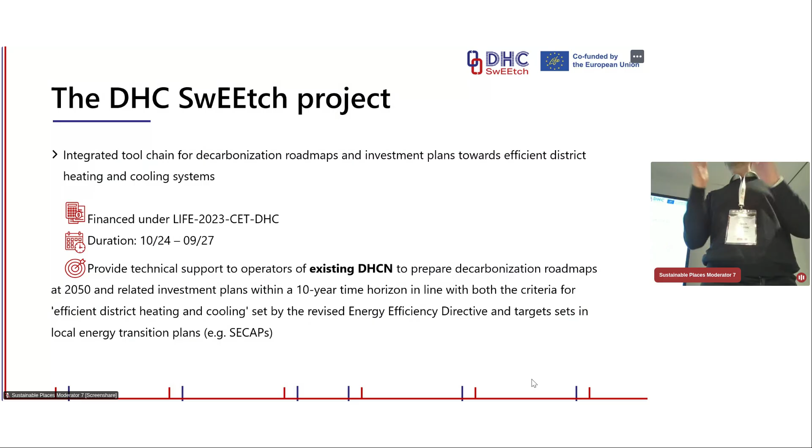And part of the roundtable will be exactly about understanding these criteria that change over time. And that's one of the big issues. Partners, not so important. I can only mention that we have A2A, an Italian operator, and 2 Croatian operators, and indirectly a Polish operator.

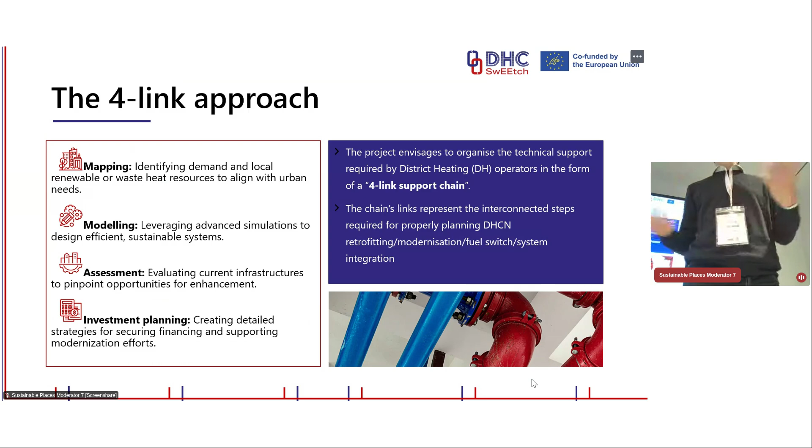Specificity of DHC SwEEtch, that's more, if you will, a communication issue. It's divided in 4 links. And the 4 links are about identifying and mapping, on the one hand, locally available renewables. On the other hand, locally available waste heat. And on the other hand, potential for extending the demand. So which additional customers can the operator reach in the future to increase the business.

Then comes selecting scenarios, we call them modernization scenarios, that have to meet the new criteria posed by the Energy Efficiency Directive. We simulate them, and afterwards we evaluate them from a financial and bankability perspective. So that means also we have to quantify the cost to make each scenario come true.

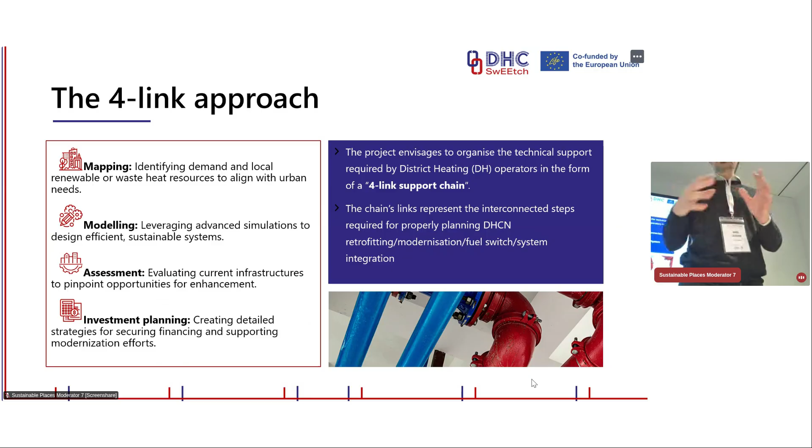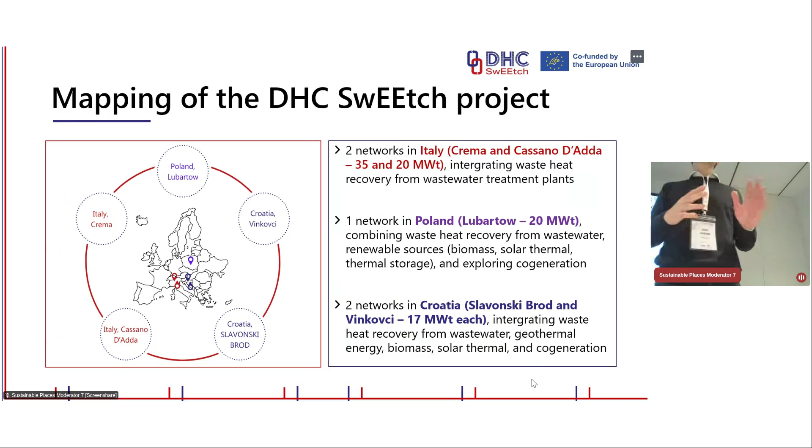Our case studies are 2 networks, all real networks, of course. 2 networks in Italy, here around Milano, let's say, 35 and 20 megawatts peak thermal demand. 1 case study in Poland, and 2 case studies in Croatia. And you see the size is medium to small, especially if you compare to Northern Europe or Central Europe. But for Italian standards, it's medium size, I would say.

Okay, other specificities. First of all, what the Italian partner URAC is doing, they developed a methodology for a relatively quick evaluation or quantification of available waste heat, available renewables, and potential additional demand in terms of customers. I think the most interesting is the waste heat part, because for renewables there are a lot of maps meanwhile available at European level, at local level, but waste heat is a bit different. It requires knowing the processes, the industries, and that's not always public domain.

To make it short, I'm also not an expert on that, but they based it on the NACE code. In Italian, we spell it NACE. I don't know in English how you would spell it, but it's a way to start from official information publicly available in most cases, and out of this very simple information come up with a meaningful estimation of how much waste heat could be available and at what temperature level, because that's of course one of the big changes when it comes to district heating.

Sorry, it's a bit slow.

Okay, I forgot now. Here we have IES, represented here today by 2 colleagues, who is extending the software, mainly adding a dashboard for the investment planning. So the idea is that IES, which is a commercial software company based in Ireland, at the end of the project also comes up, after simulations, with a dashboard meant for investors that allows to identify and show the most important KPIs a bank or a board would evaluate before deciding we go or not, we finance or not your investment.

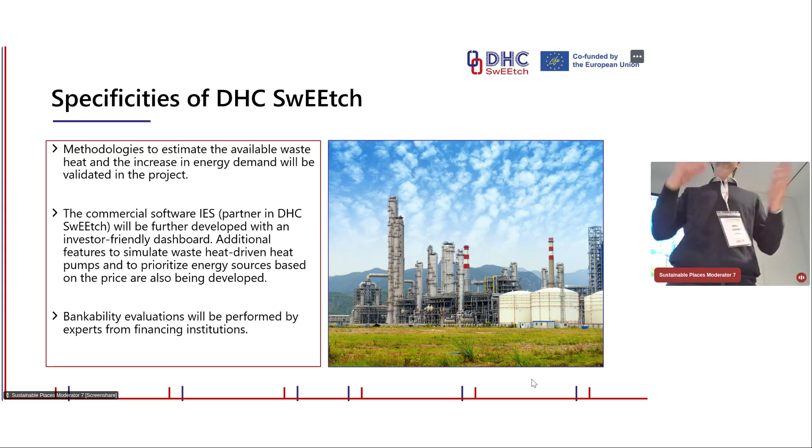software environment. So they're now trying, for example, to add the capability of heat pumps to pick up the waste heat available, mapped in the previous part of the work I mentioned before, and consider the temperature levels. So this is part of the work being done, and as I said, bankability.

Finally, a general comment: when you work on a district heating extension or modernization problem, or even a new network, that has, unlike other technological environments, as one of the main challenges the fact that you have to work with many stakeholders, because it's related to urban planning, it's related to European directives, it's related to technologies, it's related to customers, which are families.

And so what I, as a coordinator, realized pretty soon is that if we work like we do in EU projects, work package by work package, so first we do the mapping, then we select the scenarios, then we simulate, then we see if they are bankable, potentially this could be an almost never-ending loop. Because you come to the end and realize this scenario is financially not viable, or maybe it's viable, but a bank would not finance it because it's too risky.

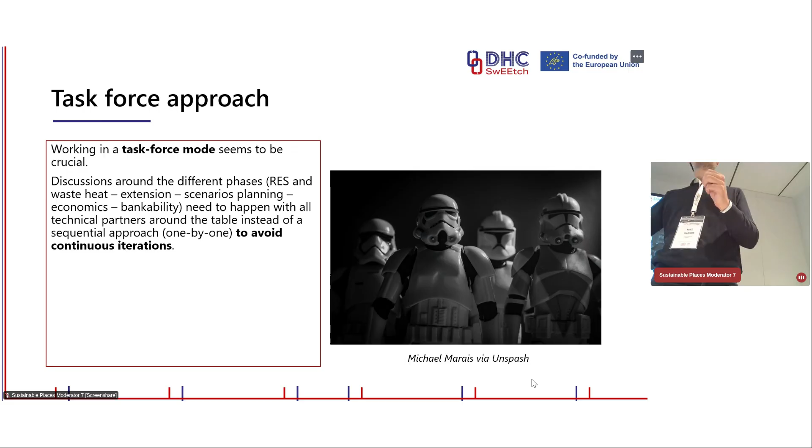So our approach is trying to be a task force approach, where we sit around the table for each case study with all the heads around that table and try to anticipate. So right from the beginning, does this measure make sense? Not only technologically, not only energetically, not only from an acceptance point of view, but also from a bankability and financial perspective. That's, I think, one of the main challenges.

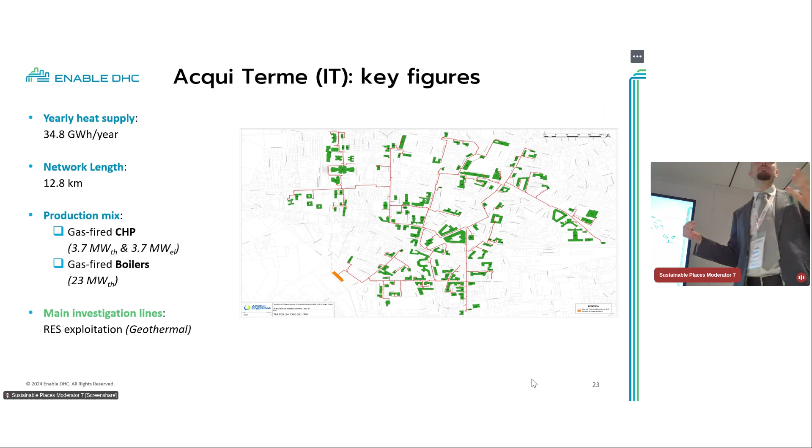Basically, we as Optit are trying to aid them in this endeavor. First of all, we try to split the issue in two parts. A, what can you do with your current assets without more or less spending any money? So you do have efficiency, you have flexibility inherently in your portfolio of assets. Can you dispatch them efficiently in your day-to-day operation and still achieve economic and/or environmental results?

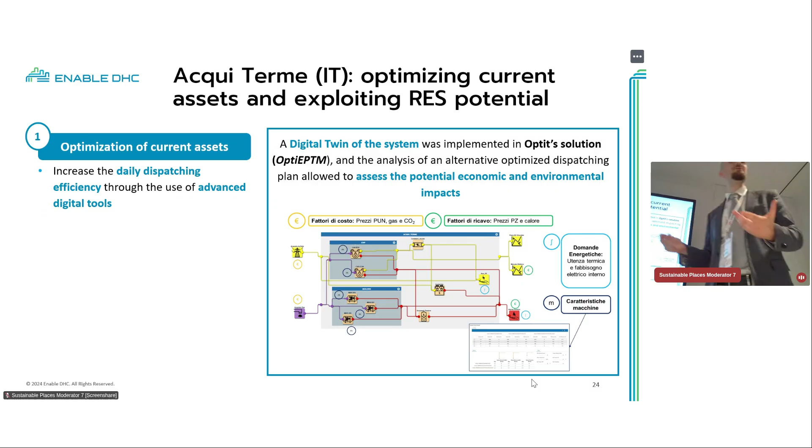We've done so with our proprietary tool, the OptiEPTM. Basically, we created a digital twin of the system and created a benchmark to assess the reduction in CO2 and the increase of euros that solutions like this can bring. Once you have a digital twin of a system, you can look at the future, understanding how can I expand my portfolio? How can I integrate new RES sources? You can do it in a bunch of ways.

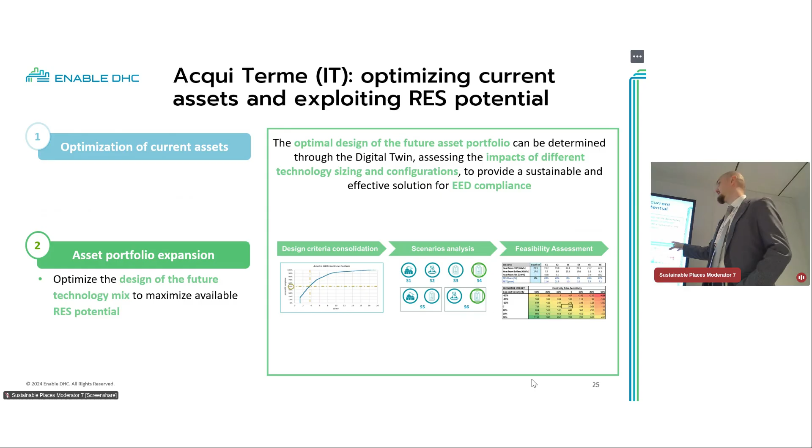The situation there is pretty peculiar because they have a high geothermal potential, so of course that's the first thing that came to mind. So basically, we are aiding them to identify the best design. It wasn't really a matter of which technology, because in that case it was pretty clear. But we are aiding them in assessing what size the storage must be, or what size the heat pump must be, etc. Starting from understanding what the design criteria should be, analyzing a bunch of scenarios, and then understanding which scenarios are actually feasible from a technical and economic standpoint.

Moving on to another very different case, Wien. I think you know where Wien is. It's a pretty different kind of system, a different beast, a very big system with its own complexities. And it's a very diverse portfolio there: CHP, waste heat, industrial and waste incineration, heat pumps, biomass units. Basically, they pretty much have it all. And they are trying to understand whether they can expand the technology mix even more, adding some fancy stuff such as carbon capture, green gas, hydrogen, and stuff like that.

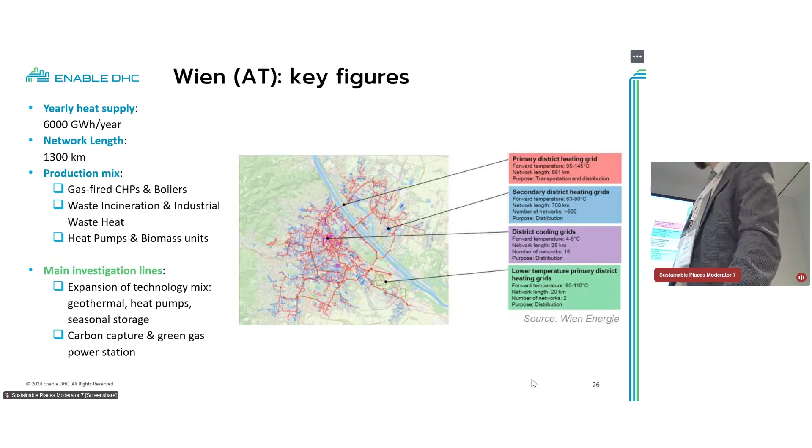AIT is aiding them in this endeavor, and first of all, they are outlining the factors that drive uncertainty in analysis and investment, because of course, you look at the future, you may have some forecasts of anything, but you never know what is going to be tomorrow. They are assessing what the major drivers are, heat demand, commodity prices, and other drivers, to define an uncertainty framework.

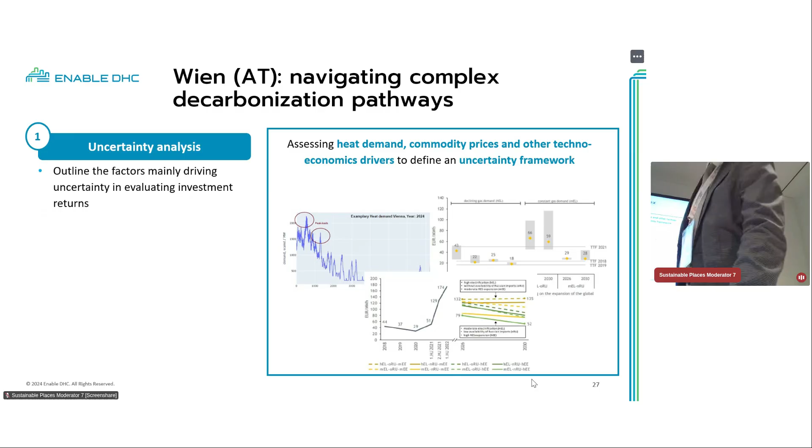Once they've done that, using Monte Carlo simulations, they analyze decarbonization pathways, basically utilizing Monte Carlo simulation as a stress test of the pathways they are hypothesizing. This should lead to a good idea of what's feasible in terms of decarbonization pathway and how robust that assumption is.

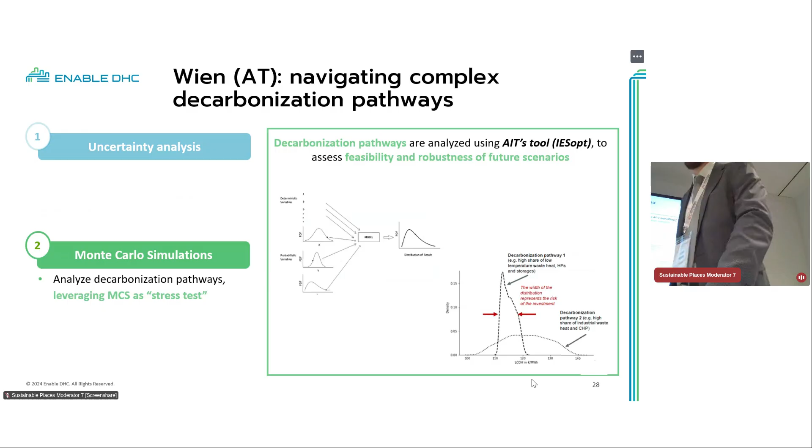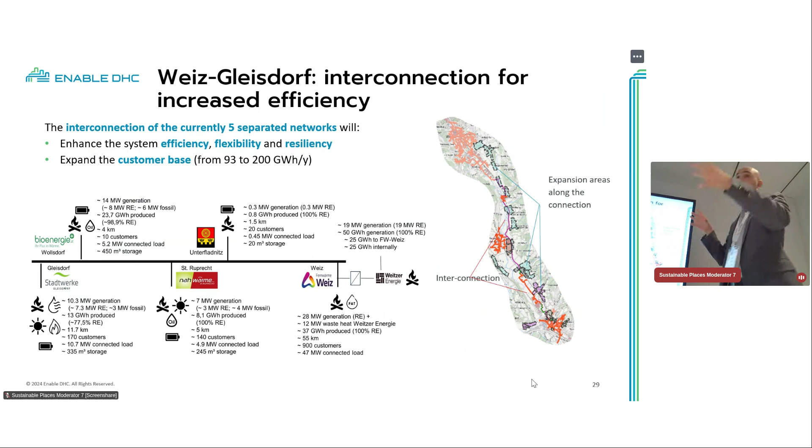Last but not least, Weiz-Gleisdorf, hopefully I pronounced it correctly, a small system in the eastern part of Austria. There, the situation is even different. You have five very small systems, and the challenge here is not really to imagine fancy stuff, rather to do a very simple thing, but it's challenging at the same time. Let's interconnect them, because you can better leverage the already available technologies, such as biomass and so forth. While you're at it, expanding the network and interconnecting the systems, you can connect more customers along the way.

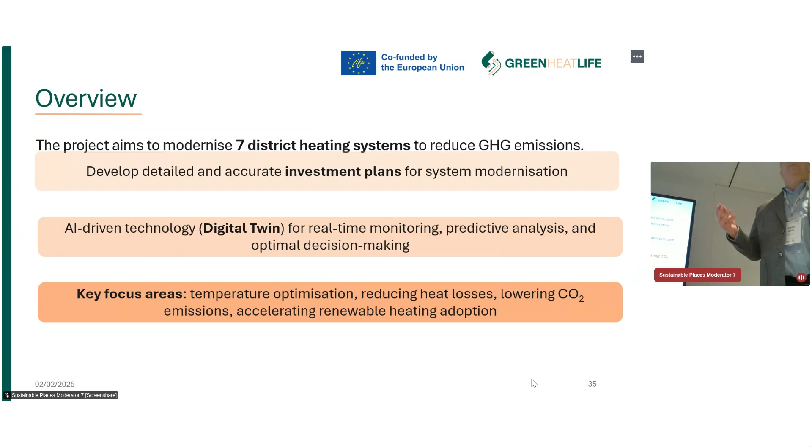Okay, so what is this project about? Basically, the aim is to modernize these 7 district heating systems. And how can this be done? The idea is to create a digital twin for each of these 7 district heating systems. And this digital twin will allow basically 2 outcomes. The first outcome is that we expect to make our networks more efficient by controlling the network temperatures, and the second outcome is an investment plan about decarbonization, and the investment plan will be developed on some decarbonization scenarios that will be run by the digital twin in order to be able to choose the most cost-effective one.

The project consists of 5 work packages, but basically the most important outcomes are creating the digital replica of the system, identifying the critical components of each system in order to find the most effective solutions, improving and optimizing the operational parameters, integrating renewable energies in the systems in the long term, of course, and developing and approving investment plans focused on GHG reduction. Of course, the final part of the job is sharing the best practices, as we are doing today.

So the first step of our project is gathering data, collecting data, and validating them in order to build the digital twins. Some companies have already completed this step. Some are in the process. For instance, Mantova has already completed this part of the process. So the digital twin is up and running, and we are already adopting the optimized set points that the system proposed. While other companies are still gathering data and building the digital twin.

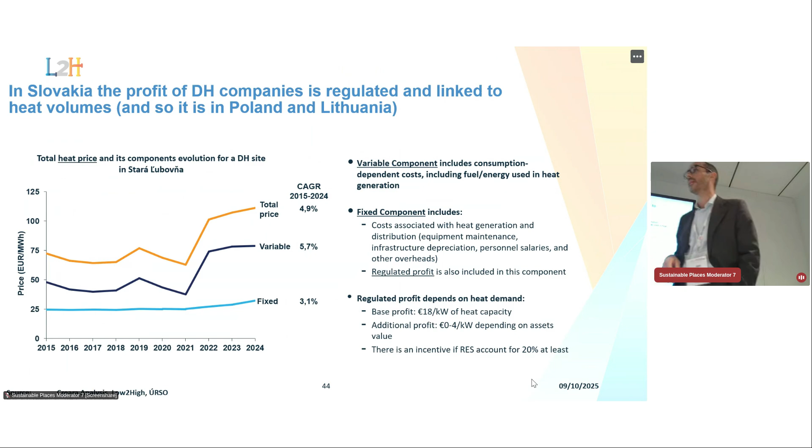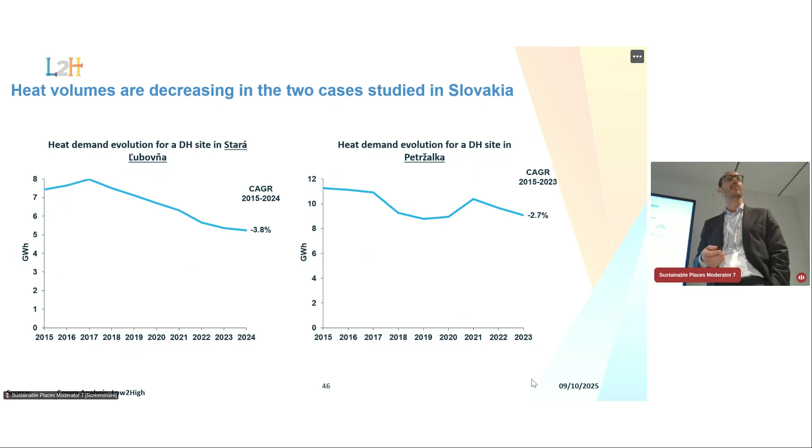Okay, so how are energy volumes evolving in these 2 sites? Essentially, they are decreasing, and this is the issue. We want to decarbonize a business whose volumes and size are decreasing. This is not something very attractive, right? If you're an investor, you don't want to go into a business which is falling. So what we see is it is decreasing between 3% and 4% per year over the last years. And we said, well, we have to forecast this and model this, and which are the elements included in these trends. And we identified 2.

One, this is just a matter of decomposing that variable into parts. The first one is the unitary consumption, that is energy consumption per apartment, how that evolves and why. And the second one is number of apartments connected to the grid. So essentially, you want to see, if possible, more apartments connecting to the grid, and if that is not possible, at least not seeing them getting disconnected.

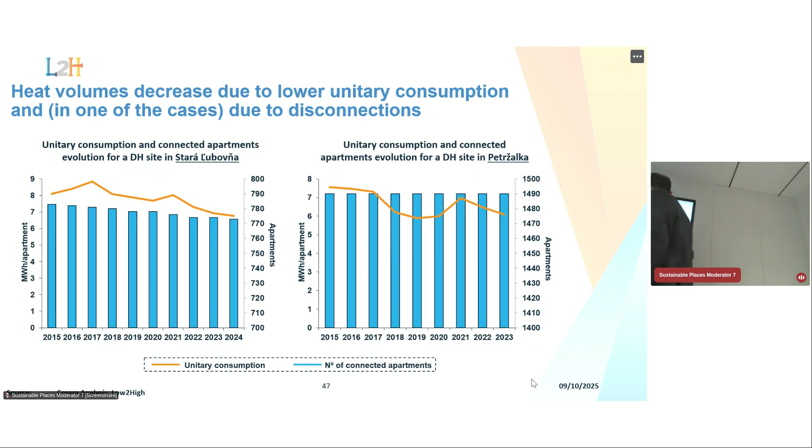So what we see is that in Stara Lubovna, the number of apartments are decreasing. This is the axis over here, slightly, but it is decreasing. While in the other one, they are stable. And the unitary consumption in both cases is decreasing. And let's analyze both of them separately.

This is analyzing the evolution of unitary consumption. One element that has a huge impact is the degree of insulation of buildings. Essentially, in this city, in Petržalka, buildings are being renovated, they are being insulated, and that has a strong correlation with unitary consumption. As you can see, the correlation is very strong. Over here, 90% in 2022, almost all buildings in the city have been renovated, and that means that this element will not be a factor of generating a decrease in sales volumes anymore.

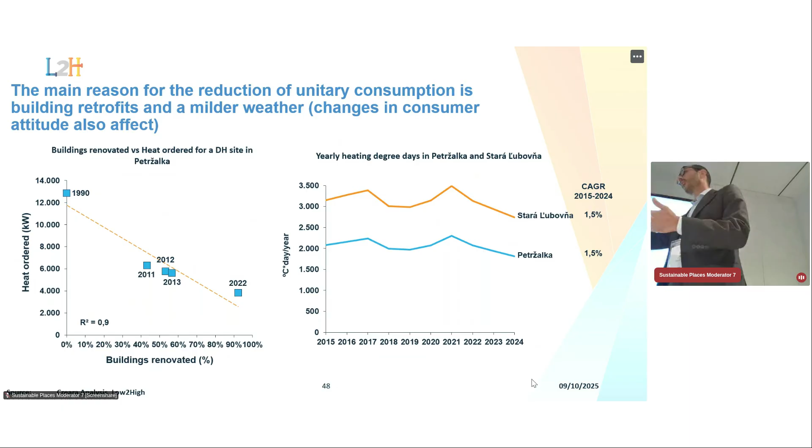And the second one has to do with essentially climate change. This is the number of degree days. I don't know if this is something used internationally. Degree days. Okay, so we see that this is falling by 1.5%. The curve is exactly the same because we have extrapolated with what happens generally in the country. But if we do the same analysis for them separately, we'll see also a decreasing trend. So this is also bad news because people are going to need less and less heat year after year. And this is something that helps us to understand how to model the future, right? It's not a matter of guessing, it's a matter of understanding why.

And this one has to do with the number of apartments connected to the district heating sites. So essentially, you don't want to see people disconnecting from your grid. You want to see people connecting to your grid. But the problem over here is a matter of economies of scale. The way the price is built in this regulatory system, the price increases when you have less volumes or less customers, essentially. So we see also there is a strong correlation between the demand in year T-2, which is 2 years previous, which is what regulation uses, and the fixed component of the price in year T.

So essentially, we see this district heating is losing clients, and therefore selling less and less. And that means that every year, in a pretty stable way, prices are increasing. So that is also bad news.

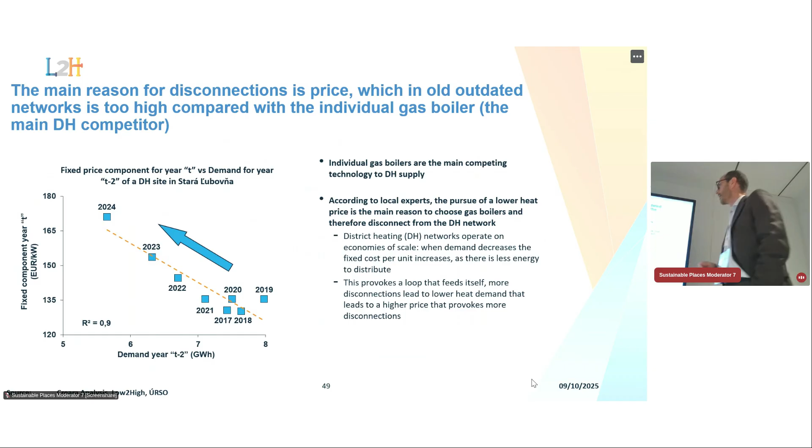So as a conclusion, this is the scenario. Heat volumes are expected to decrease in the 2 Slovak cases analyzed, and I guess we're going to find something very similar in the other 2 countries, and probably elsewhere, more in Central and Eastern European countries. Because over there, district heating is perceived as something old, and people don't want to stay in district heating. They want to be free and have an individual gas boiler. This is an issue. This is something psychological or sociological, but prices are said to be the main driver for this. So essentially, district heating companies should offer attractive prices compared to gas boilers. This is something important.

So we see heat volumes are going to decrease because of a milder weather and also energy regulations in buildings, something to take into account very much to model the future. And then this issue about disconnections, it would be ideal to somehow break the link between lower volumes and higher prices. That would be fantastic. That is, I think, a very good takeaway for the policy recommendation. And second, the way regulation is built, demand volumes are very important at the moment. So this is something to give a thought about, because it could make it more difficult to finance the decarbonization investment for this kind of sites.